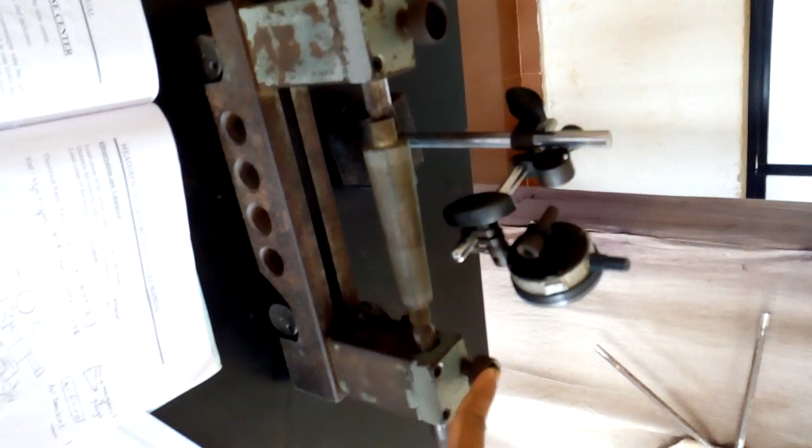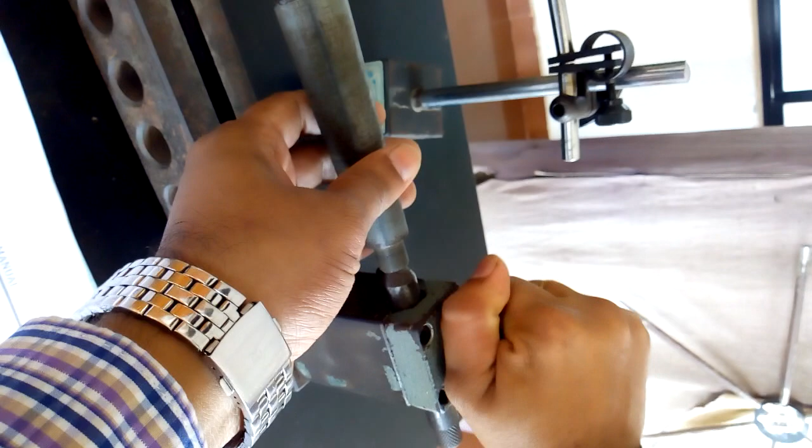Hello guys, today we are going to do an experiment on angle measurement using a sine center. This is the sine center, and this is the dial gauge. Here the taper rod is placed, and we are going to find out the angle of this taper.

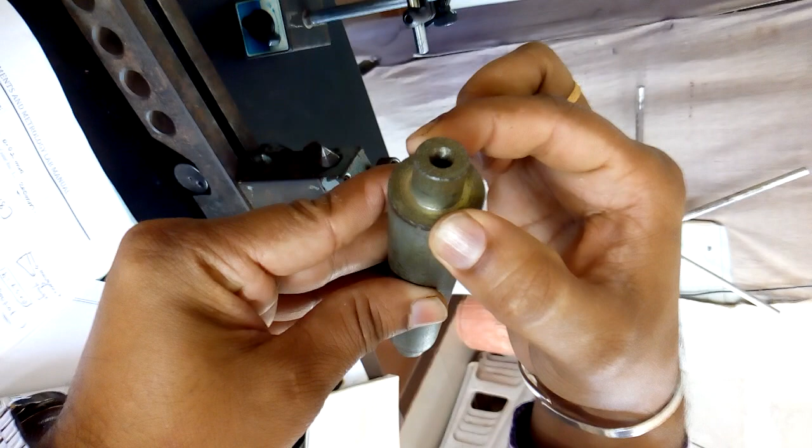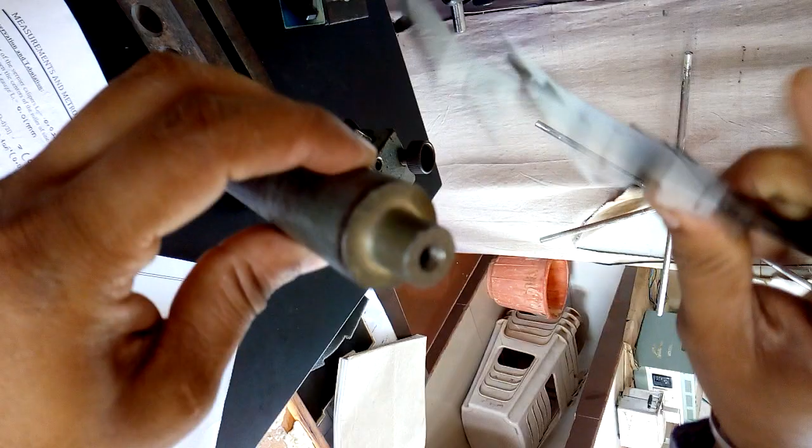For this, initially we should identify the major diameter and minor diameter. This is the major diameter and this is the minor diameter, with the help of the vernier scale. I hope all of you know how to use the vernier scale.

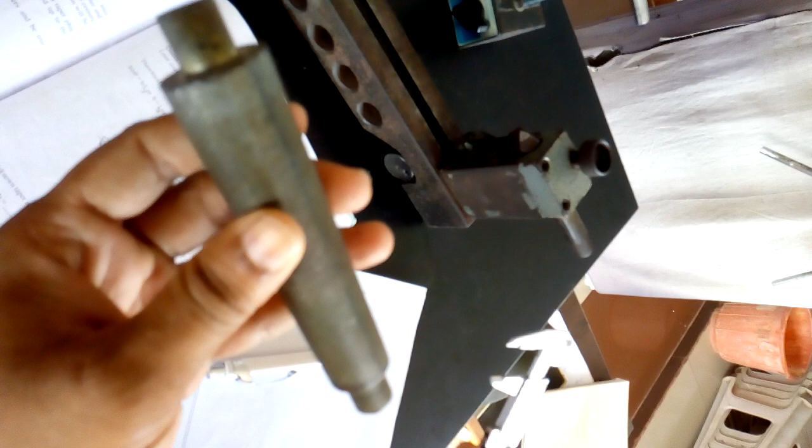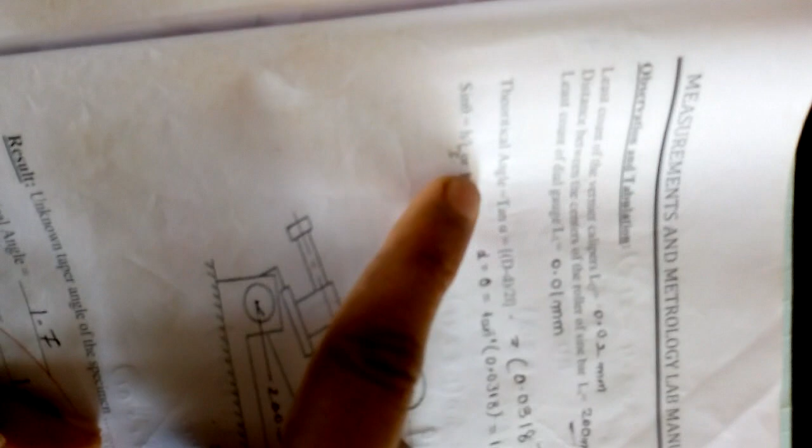With the help of capital D and small d, we should identify the angle alpha. Here is the formula: tan alpha is equal to D minus d divided by 2L. This is the capital D, this is the small d, and this is the L.

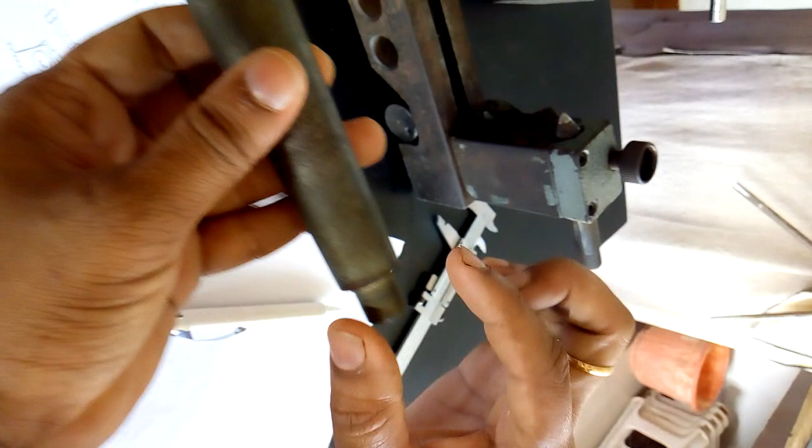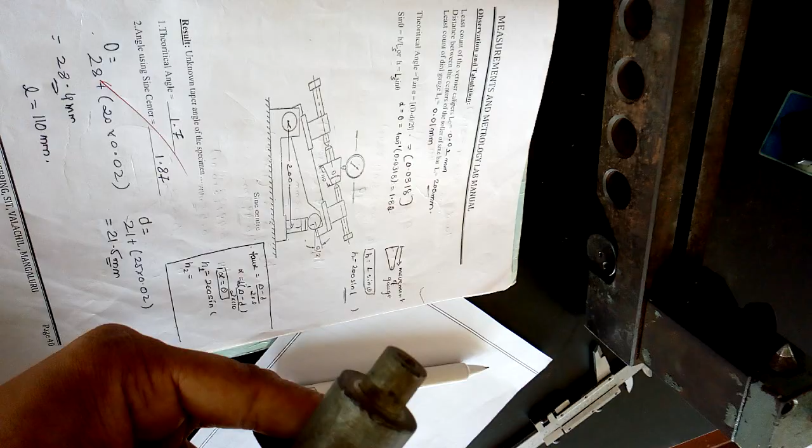By using this, we should identify alpha. Alpha is nothing but theta. With the help of this theta, we should identify the h value. This h value is very important to start our experiment. If we have the h value, then we can make a slip gauge set.

This is a slip gauge. Once the h value is identified, we should build a slip gauge set accordingly, wring the slip gauge, and then place it below this roller.

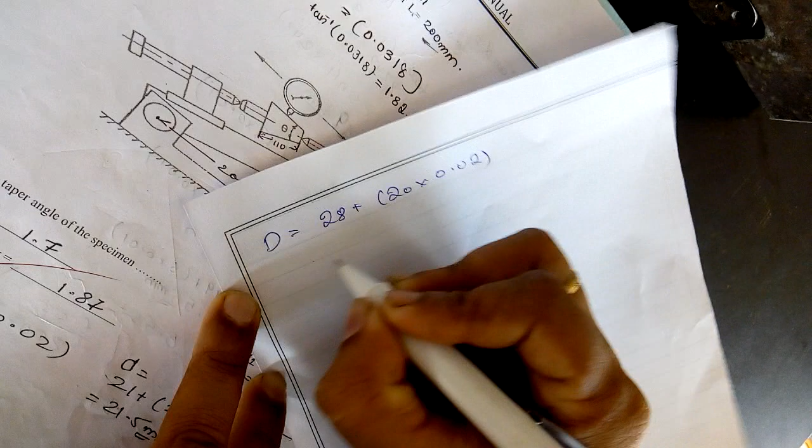This is the capital D. The capital D is about 28. The vernier scale reading shows 20, and the least count is 0.02. So now we identify capital D: D equals 28 plus 20 into 0.02, which equals 28.4 mm. Next we should identify small d.

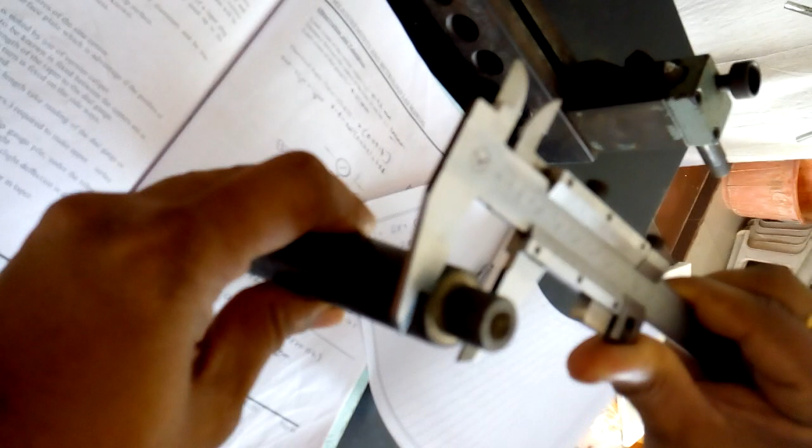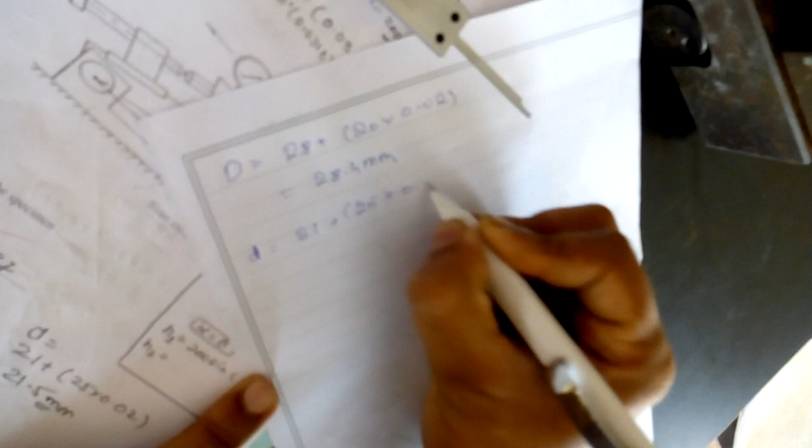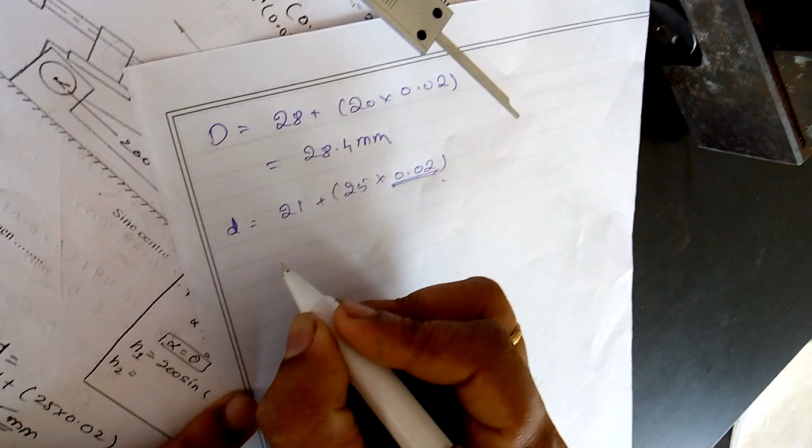This is small d. This is about 21, and the vernier scale reading is 25. 21 is the main scale reading. Small d is equal to 21 plus 25 into 0.02, that is the vernier scale least count. Least count equals 1 MSD divided by total number of vernier scale divisions. So small d is equal to 21.5.

Now we should identify the L value. This is about 110 mm or 11 centimeters. So L is equal to 110 mm. Now we should identify tan alpha.

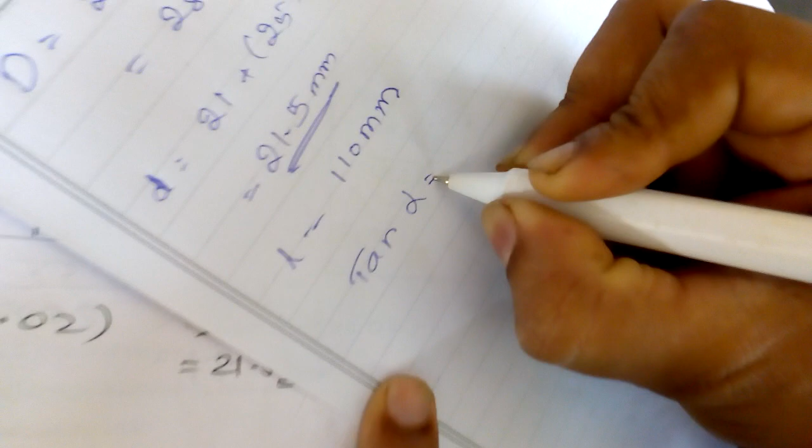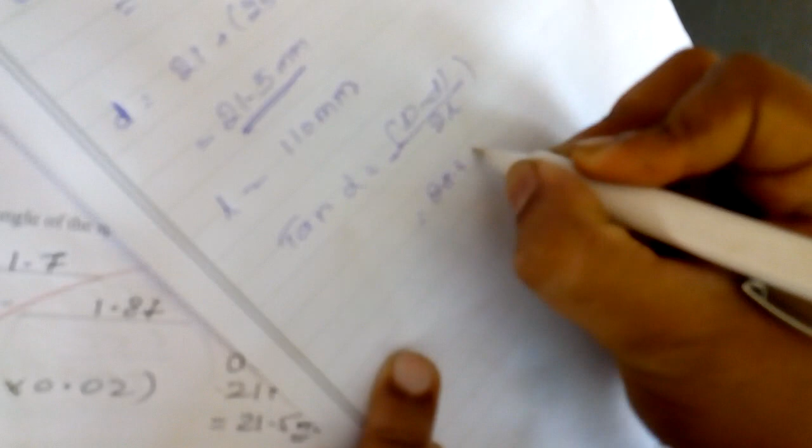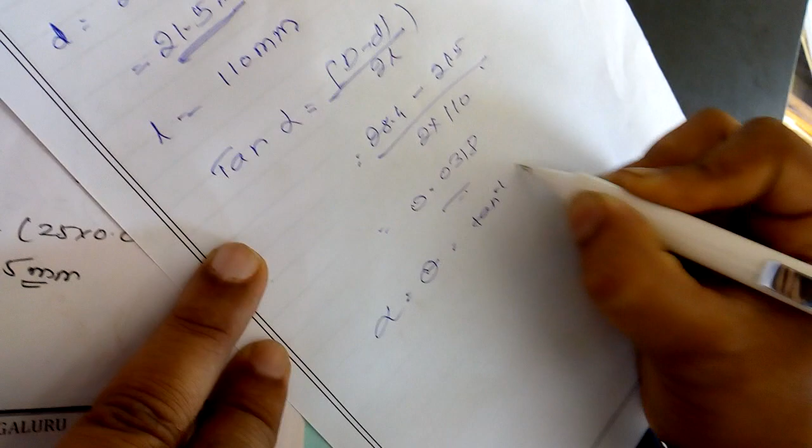Tan alpha is equal to capital D minus small d divided by 2L. We substitute: capital D value 28.4 minus 21.5, divided by 2 into 110. The tan alpha value is equal to 0.0318. Now alpha is equal to theta, which is equal to tan inverse of 0.0318, that is equal to 1.82.

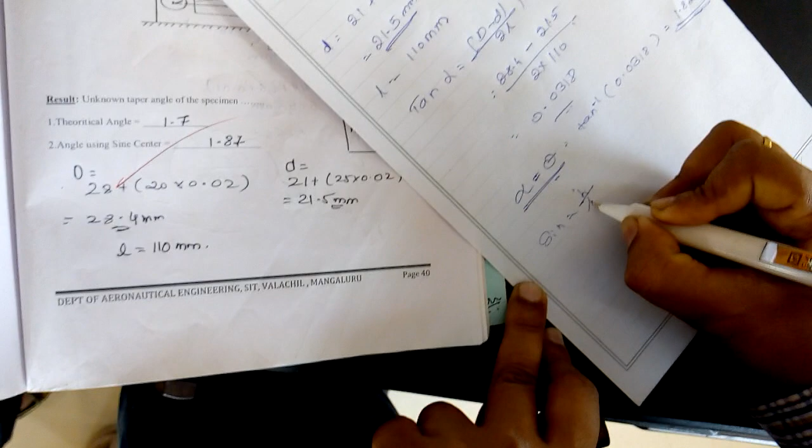Alpha is equal to theta, please note down. Now with the help of this value, we should identify the h value. Sin theta is equal to h by LS. So h is equal to LS into sin theta.

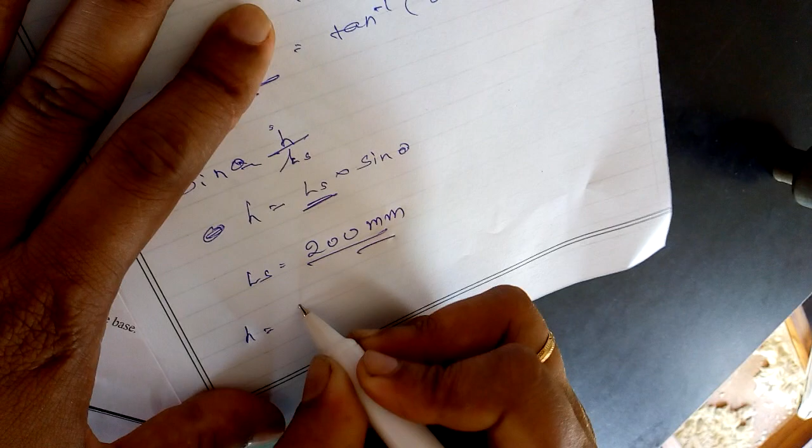Now what is LS? LS is equal to the distance between these two rollers, that is about 200 mm. Now h is equal to 200 into sine 1.82, which equals 6.35 mm.

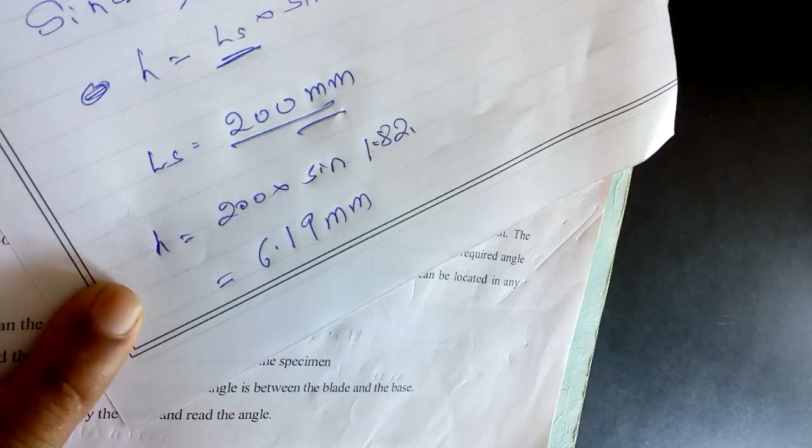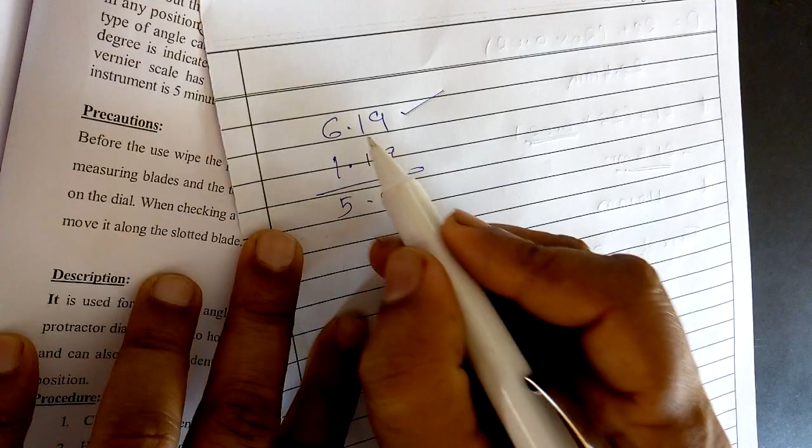Now we should identify the slip gauge set for this 6.19. How can we identify this slip gauge set for 6.19? Initially, we should make the rightmost digit 0. To make this 9 into 0, we should use a 1.19 slip gauge. We should subtract 1.19 from 6.19, and we will get 5.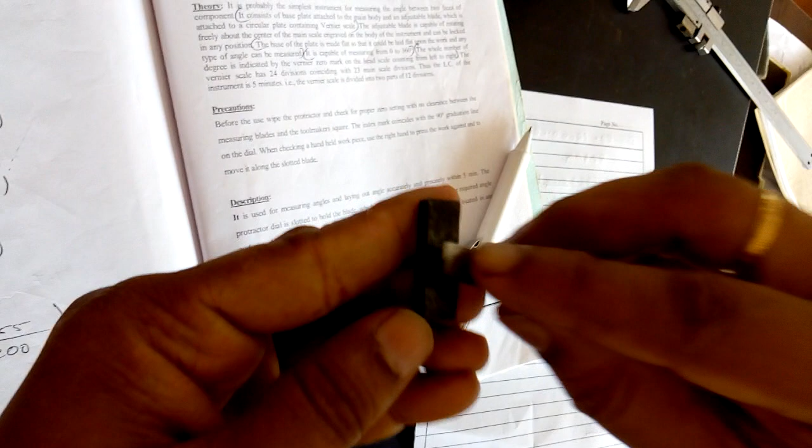This 1.19 is available in this slip gauge set, you can see it here. And another slip gauge that we need is 5, it is over here. We should select these two slip gauges and ring them together. Initially we should place them in a perpendicular manner, apply a little force, and turn it. Now it is stuck together, you can see it will not fall down. So this is what a slip gauge set is.

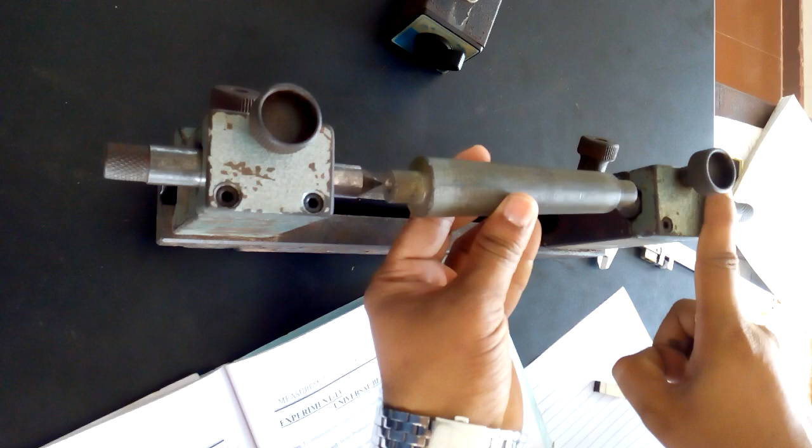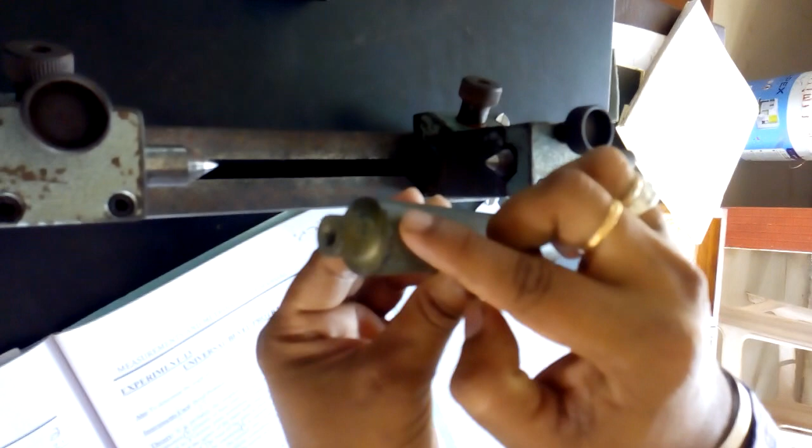Next, what we should do is keep this taper rod on this instrument. This is what's called a sine center. We should note down, this is the larger end, a bigger diameter, and this is a small diameter. The bigger diameter we should always place like this, and we can tilt like this only. From whichever side we are tilting, for that end we should fix the smaller end. We should fix it like this and tighten this knob, then check whether it is rotating properly.

Next we should place this gauge under this roller, like this. We should keep our dial gauge like this, placing it at this extreme end. To move this slip gauge we should make a mark, then it will become easy. In this extreme end we should place our slip gauge like this.

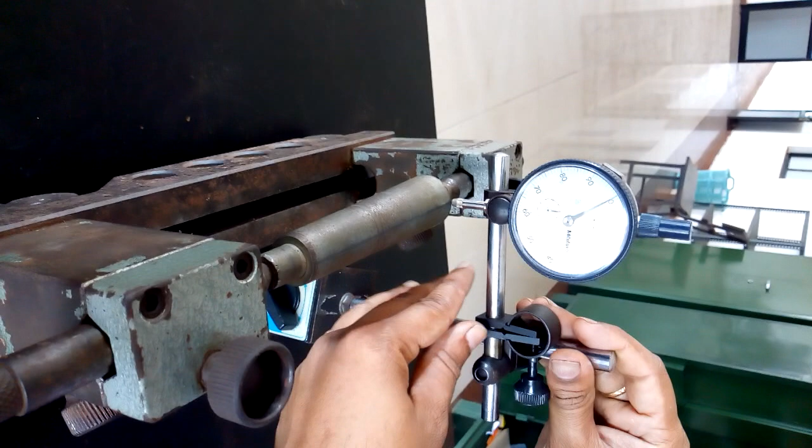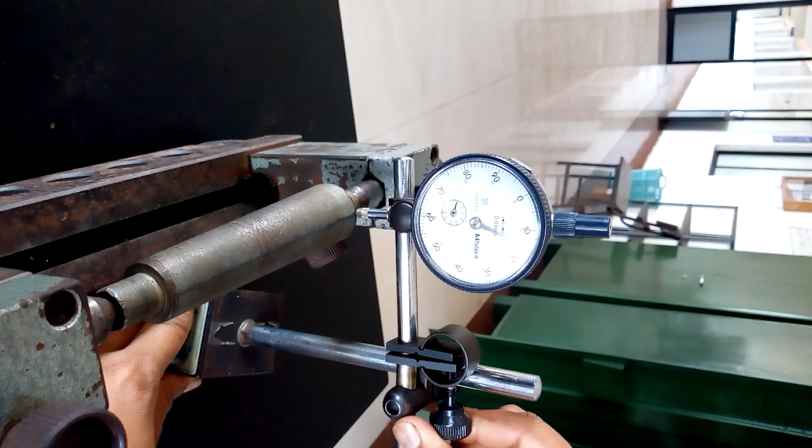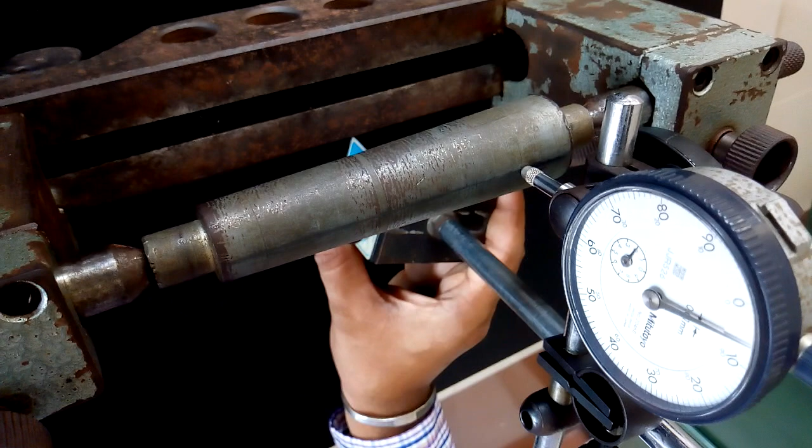Next we should apply a little load on this. You can see the dial gauge is rotating when I am applying load. One or two rotations, that is enough. Next, we should move this slip gauge from this end to this end. By moving this, we can identify how much difference there is.

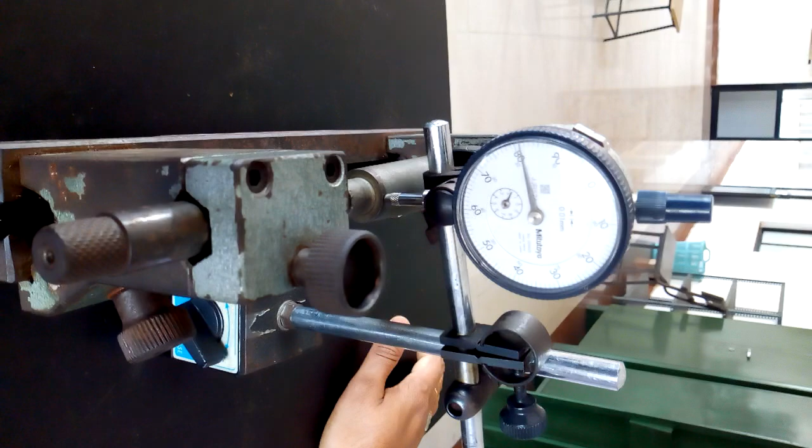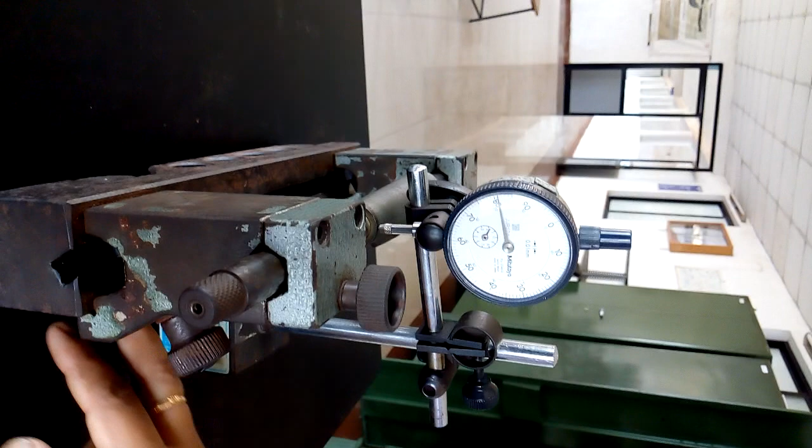About 19 divisions difference in the negative side. Same, 19 divisions difference is there in the negative side, so we should add this 0.19 mm to this slip gauge set. Initially we got 6.19, for this we should add 0.19, and we will get 6.38. For this 6.38 we should build a slip gauge set.

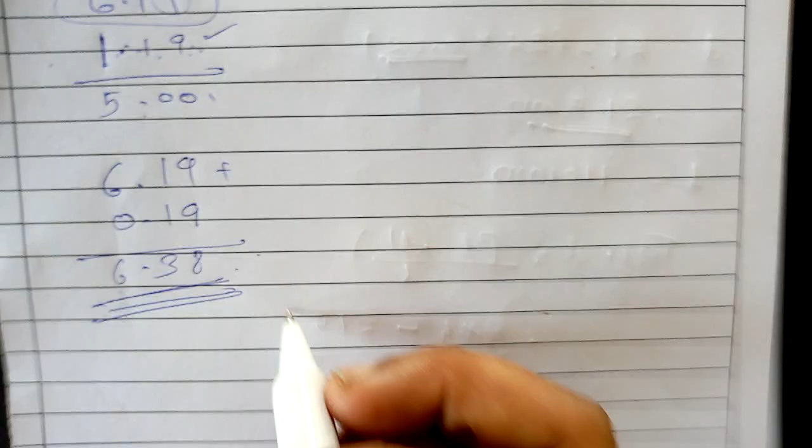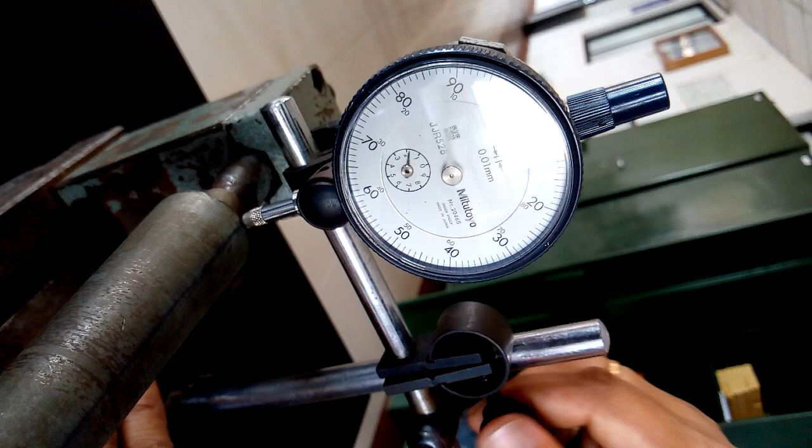I'll ring this together, and then I'll place this. Now again I'll adjust this. I'll bring this plunger over here and apply a little amount of load, around 2 rotations, and then I'll make it 0 by rotating this.

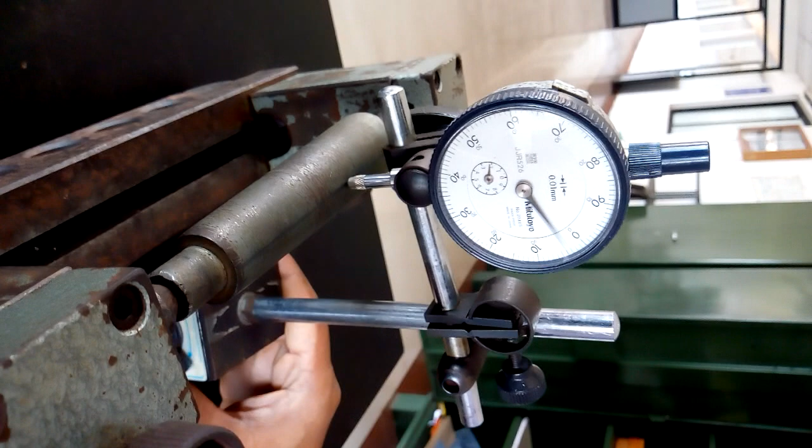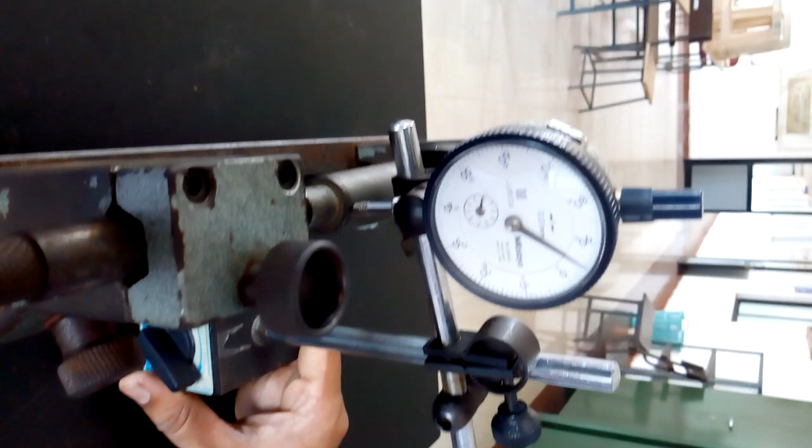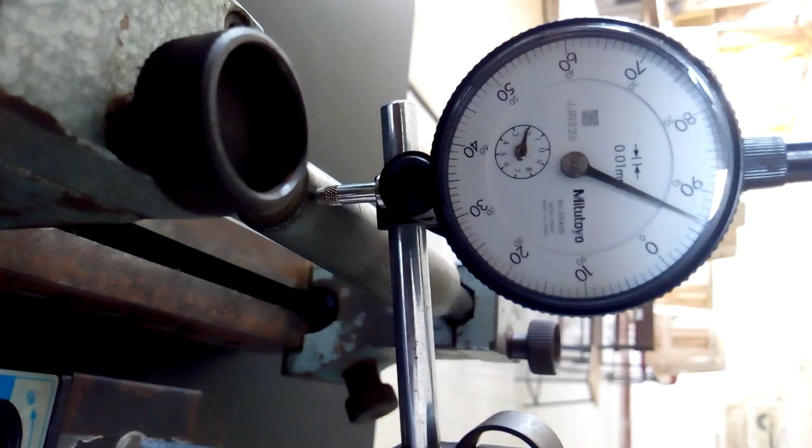Now I'll move this from upper end to lower end. Very small difference. Same, only 0.05 mm difference is there. This is a negligible value, so we can stop our experiment here.

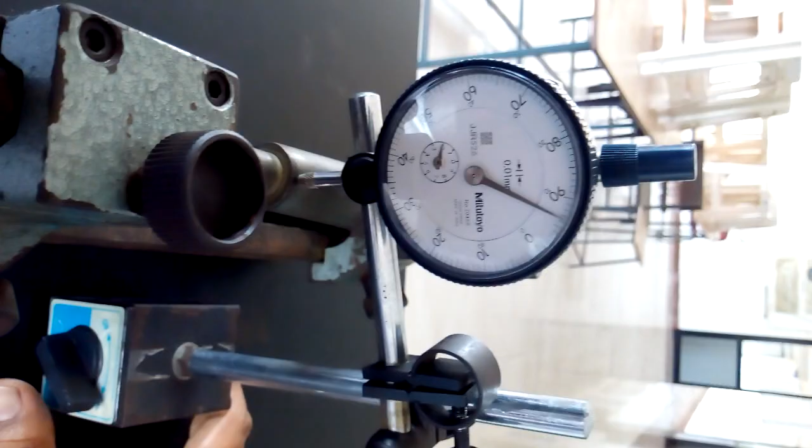If plus or minus 0.05 is acceptable, we can stop it over here. We should take this value as the final H value. This value, how much is it? That is 6.38. 6.38 is the final H value. For this 6.38 we should identify theta.

Theta is equal to sine inverse of H by L. Theta is equal to sine inverse of 6.38 divided by 200. Sine inverse of the answer, that is 1.82. This is what theta equals, 1.82 degrees. This is the final answer.